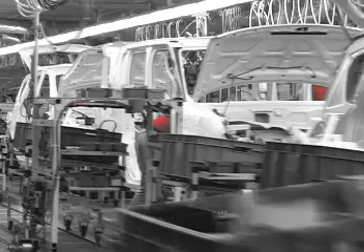Even if only one defect was found, it is very unpleasant for customers who purchased the vehicle. It is important to conduct not to receive defect, not to produce defect, and not to pass defect at each process.

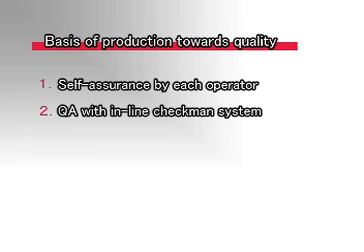The fundamentals to building quality are as follows: 1. Self-assurance by operator. 2. Quality assurance by checkman system.

3. Final assurance at final area. As a total management, QRQC stands for Quick Response Quality Control. The key point of QRQC is to control the PDCA cycle of quality quickly. There are 3 key points as follows.

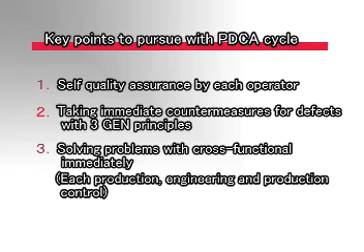Building quality as operator himself. Quick response to defect with 3 Gen principles: on shop floor (Gemba), with actual object (Genbutsu), by realistic method (Genjitsuteki). Solve with cross-functional effort, such as by production, engineering and production control.

For one of QRQC's functions, we have the QRQC meeting. From now, I will explain how to solve quality defects and how to proceed with the meeting.

The QRQC meeting has been held once a day. Shop floor conditions are always changing, and if the meeting is not implemented once a day, we cannot grasp the shop floor situation.

The members are comprised mainly of director and department manager to decide and implement countermeasures as soon as possible when problems occur. Managers from each shop are mandatory to attend the meeting, from stamping, body, paint, plastic, trim and chassis, including department managers from production, QA, and engineering.

Also, representative senior supervisors from each section and department attend the meeting. They are assistants of the department manager and are responsible for managing the shop floor.

In addition, managers from engineering department, production, logistics, and maintenance section, and representative senior supervisors and staff from each shop attend the meeting in order to take countermeasures against issues relating to production, logistics, facilities, and engineering. If they cannot attend the meeting, it is necessary to send a substitute.

At this line, the meeting is held basically for 30 minutes every morning from 9 o'clock.

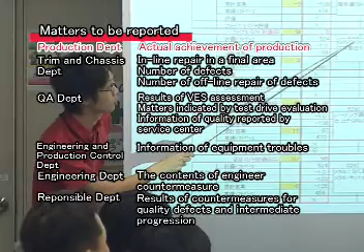First, production department reports planned production and actual production. They share information on whether unachieved targets are caused by things such as quality defects or facility breakdowns.

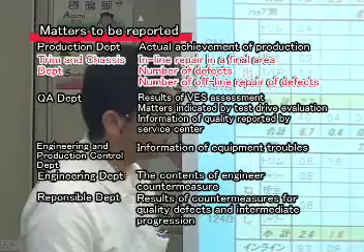Senior supervisor of the trim and chassis final area reports the number of inline repairs, offline repairs, contents of major defects, and number of final on-hands from the previous day.

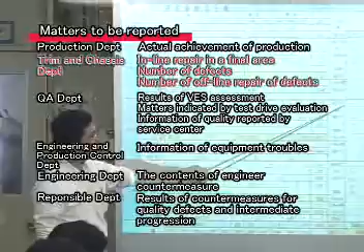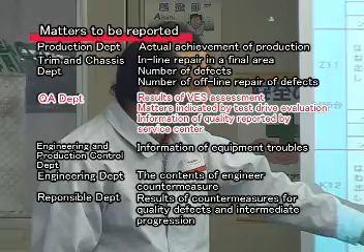Quality assurance department reports VES evaluation results, matters indicated by driving tests from the previous day, as information on shipping quality of products. It is better to have a quality report from the service center as well.

With all kinds of information, we will have more room to discuss countermeasures to improve quality.

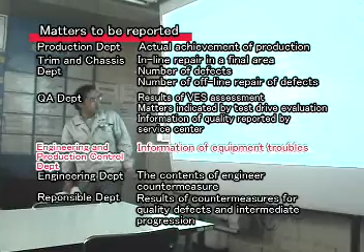Maintenance section reports information on equipment troubles. It is necessary to share this information since line stoppage caused by equipment trouble affects actual performance in production.

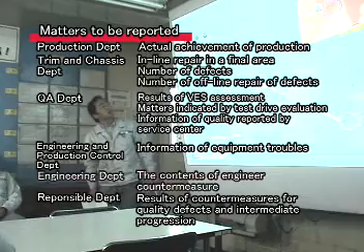Engineering department reports not only the defects the department is responsible for, but also the condition of countermeasures against defects that cannot be dealt with only by the manufacturing department.

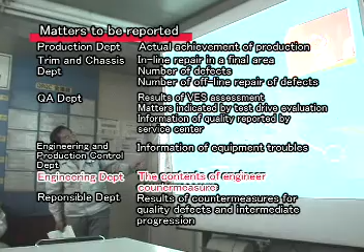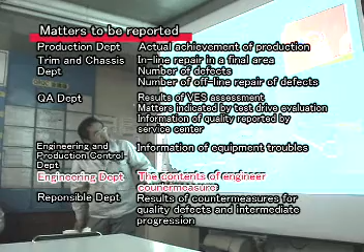This is because the department takes tentative action until a permanent countermeasure is completed, or proceeds with tentative action, cooperating with related departments. In addition, managers responsible for countermeasures against defects that occurred previously have to report the progressive condition of the countermeasure.

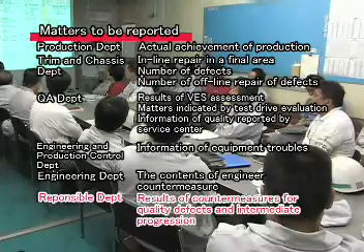It depends on the plant if additional items need to be added, but this is the minimum information you have to share at the meeting.

Chairman of the QRQC meeting should be the General Manager of the Production Department. This is because the General Manager from Production Department, who holds ultimate responsibility to decide countermeasures, being chairman, makes it faster to reach the final decision.

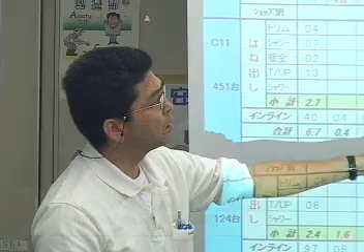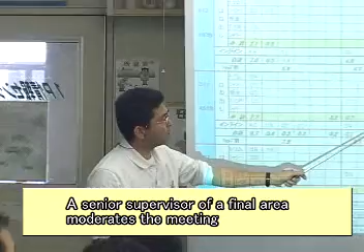The facilitator is a senior supervisor of the final area, because the senior supervisor who knows the quality condition well at the final area facilitating the meeting, proceeding with the meeting, and providing information to related departments can be quick.

Now I would like to introduce the example of how you can respond to defects.

We had a report of water leak from rear door glass at the shower check of production vehicle. Senior supervisor of final area confirmed the condition of the defect and contacted senior supervisor of glass fitting process immediately.

In this shop, contact information of upstream such as stamping and body shop is always written up on a routine basis, and when trouble occurs, they are able to contact immediately.

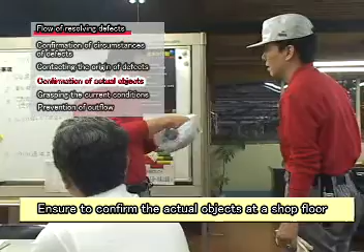Upon receiving the information, senior supervisor of the process left the meeting and immediately went to the supervisor responsible for the zone to confirm the current model. It is important to confirm the actual product at any time, not limited to quality problems.

They took off the rear door glass and confirmed the condition. Sealing folded down because it was thinner, so it caused attachment defect and a water leak occurred. Sealing became thinner because the end tip of the nozzle of sealant application equipment seemed to be clogged by sealant.

Supervisor responsible for the zone grasped the current condition. It can be understood especially through how much 4Ms - man, material, machine, and method - have been changed. When grasping the current condition, quantitative data, numbers, should be used as much as possible.

Meanwhile, senior supervisor of final area leads the procedure to confirm the condition of passing defects. We must not pass the vehicle with a defect to the market.

First, you confirm if there is a vehicle with the same defect among completed vehicles, and if there is, you specify the first vehicle with the defect. Also, there are units with the same defect on the line between the zone in which the defect occurred and final area. You confirm the particular units.

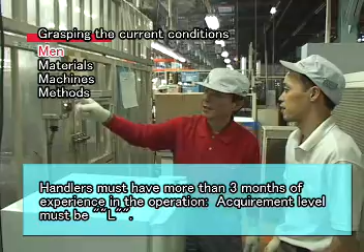Mr. Saito conducts the relevant sealing operation. He has been responsible for the operation for more than 3 months and his skill level is L. There were no changes taking place in sealant and sealant application equipment before and after occurrence of the defect.

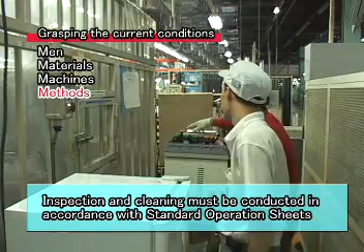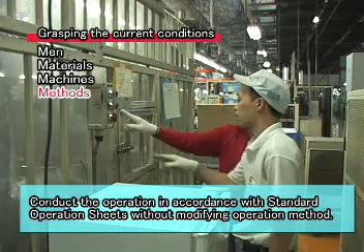Startup inspection and cleanup are conducted by Mr. Saito. On that day, startup inspection and cleanup were conducted, and the record was left. It was found out that the operational method remained the same, and a standard operation sheet was followed. So, the supervisor assumed the problem originated from nozzle cleanup.

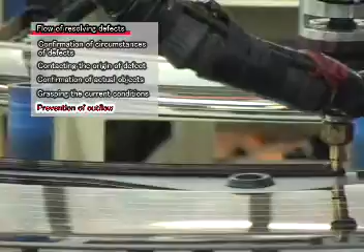Sealing was thinner when he confirmed the actual vehicle, and decided to go further with the research. Next, the supervisors confirmed exactly when Mr. Saito cleaned up the nozzle at the beginning of the operation.

He usually cleans up the nozzle right after he arrives at work - 20 to 30 minutes before the line begins operating - and dips it in the anticoagulant. However, on the day of the defect occurrence, he happened to come to work earlier and cleaned up the nozzle

60 minutes before. When he confirmed the standard operation sheet to find out exactly how many minutes before the line began operating the nozzle needed to be cleaned up, the time was not indicated.

The supervisor came to a conclusion that the nozzle had never clogged up before since the cleanup was conducted 30 minutes or less before, but on the day of defect occurrence, it was conducted 60 minutes before. Thus, even though the nozzle was dipped in anticoagulant, the sealant was coagulated more or less, and it clogged up the nozzle.

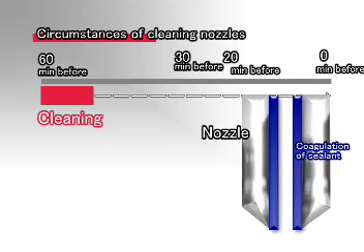The supervisor contacted the senior supervisor of the process, an engineer, and discussed the countermeasure. The engineer also assumed that the cause is that the cleanup had been conducted 60 minutes before.

Thus, the engineer researched the data of the sealant and figured out that it would not coagulate if cleanup was conducted 10 minutes or less before the line began running.

The supervisor, senior supervisor, and staff from engineering department decided to standardize the timing. This is to clean up 10 minutes or less before the line begins running. The staff from engineering department specified the timing of cleanup on an instruction card and sent the revised instruction card to the supervisor.

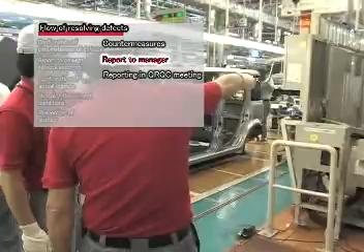For countermeasure, the supervisor and senior supervisor reported the following to the manager and received approval: to indicate on the standard operation sheet that cleanup is to be conducted 10 minutes before the line starts operation, and to instruct operators to start cleaning up the nozzle 10 minutes before the line starts the operation.

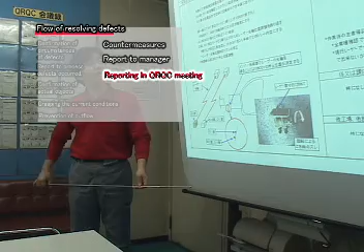Manager reports defects from the previous day at the QRQC meeting the next day. It is determined that the manager reports at the meeting, and the content of the report is determined based on line condition and prerequisites.

Defects in important A and B areas, and repeated defects or items pointed out in QRQC V1, should be prioritized in reporting.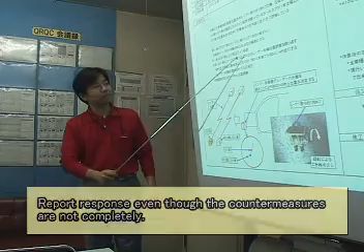When the manager, as the person in charge, reports at the meeting, better communication can be created with the shop floor by grasping the current condition. Also, when the manager discusses the efficacy and validity of the countermeasure with supervisors and senior supervisors, a better countermeasure can be produced.

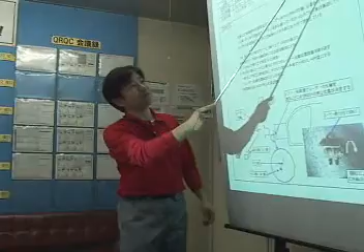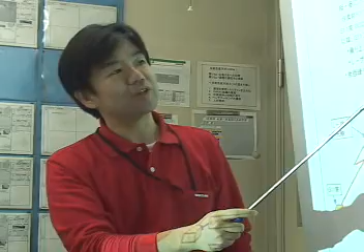We have to observe the transition of quality to see if the countermeasure completely solves the problem. Even if the countermeasure is only halfway done, it is significant to report its progress. Reporting the process of the countermeasure at the QRQC meeting means we can get a better idea more quickly than only our own process trying to come up with ideas, and we also get a cross-functional response, including from the maintenance section and engineering department.

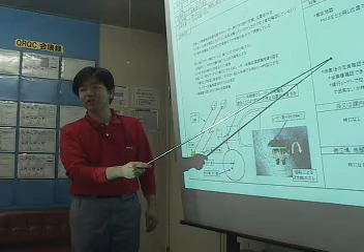Progressive control for defects proceeds as follows. Defective items to be reported are called open. Out of these, items whose countermeasure has already been reported and completed are called close, referring to items with completed permanent countermeasures. The total number of open and close items is progressively controlled every day. This is called open-close control.

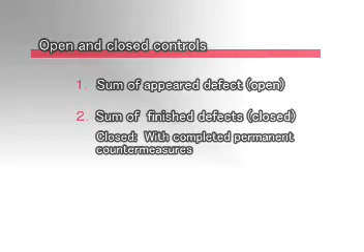More specifically, progressive control is conducted utilizing forms like these. Aside from the QRQC meeting, a carryback meeting is held for each production line, once per shift at each production line.

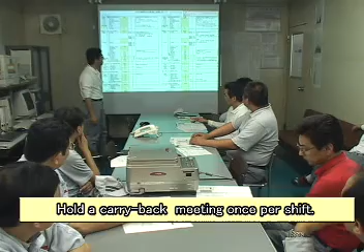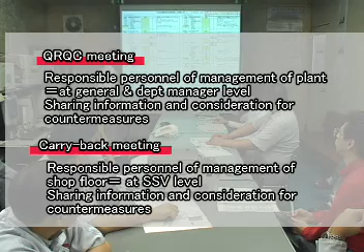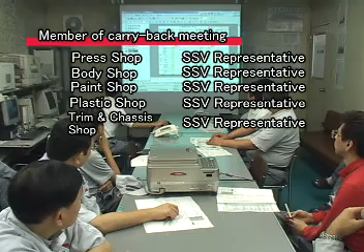Although the main purpose of the QRQC meeting is to share information and discuss countermeasures among directors and managers in charge of plant administration, the main purpose of the carryback meeting is to share information and discuss countermeasures among senior supervisors in charge of shop floor administration. Since the countermeasure for the specific production line is discussed, participants are representative senior supervisors from the final area, QA, logistics, maintenance, and engineering department, and representative engineering staff.

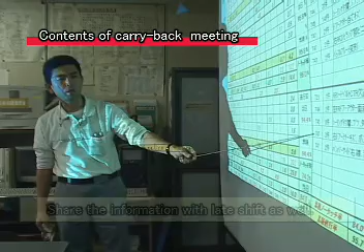The content of the QRQC meeting is shared among participants first, and the specific issue carried back by your own shop is discussed to take action. As for the issue of sealing carried back today, the report was conducted at each carryback meeting, and participants shared the information while confirming if the countermeasure was conducted correctly. A similar case existed in your own process.

Since the carryback meeting is held once per shift, the same information from the QRQC meeting is shared in the meeting held in the other shift. Through this method, information is shared across the whole plant, and efficient quality control can be achieved.

At the QRQC meeting and carryback meeting, it is determined that the problem should be managed within the meeting as much as possible, and each participant assumes responsibility for the quality problem, which should be solved with cross-functional effort.

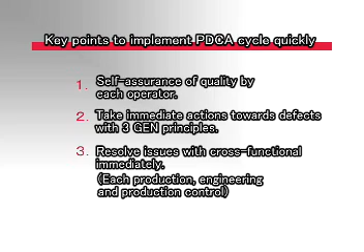Now I would like to organize the key points of Qrqc. These are the key points to circulate the PDCA cycle quickly: each operator builds in quality; defects are acted on immediately with the 3 GEN principles; and solutions come through cross-functional effort, such as manufacturing, engineering, and production control.

The next are key points for the QRQC meeting. The QRQC meeting is held once a day. Each participant should be a person allowed to make decisions to execute countermeasures. The countermeasure against a defect from the previous day has to be reported, and the manager is the one to report it. The problem should be solved with cross-functional effort. Those are the five key points.

These are the key points for defect response: respond to defects quickly on the shop floor; go to the shop floor, observe the actual object, and think of a practical countermeasure; and think of preventing the defect from passing through first.

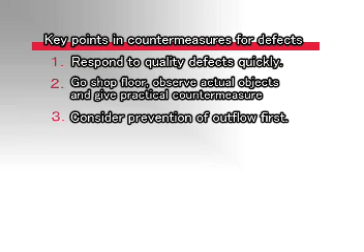Tentative countermeasures have to be implemented immediately, and permanent countermeasures must be taken to eliminate the root cause. Keep these key points in mind and proceed with Qrqc.

At the end, the following are the 10 Qrqc commandments. Don't skip the meeting because you are busy—quality is first, and substitution is a must. Don't make analysis to escape your responsibility for defects—first, think it is your fault.

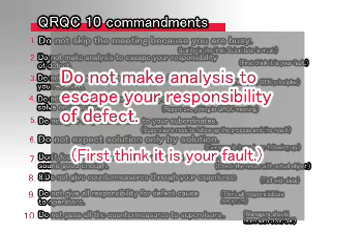Don't make any judgment only with information you received—defend the 3 GEN principles to death. Don't leave any defects unsolved just because you are not able to solve them on your own—report everything at the QRQC meeting.

Don't only give instructions to your subordinates—superiors need to follow up on the process and the result. Don't expect solutions by only asking—everyone is busy, so keep following up.

Don't feel comfortable just because the countermeasure sounds good enough—check the result with the actual object. Don't give countermeasures based only on your experience—look at the data. Don't give all responsibility for the cause of defects to the operator.

Think all responsibilities are yours. Don't pass all the countermeasures to supervisors—the manager should learn alongside the senior supervisor and supervisor.

Through this effective QRQC meeting, please conduct better plant administration.